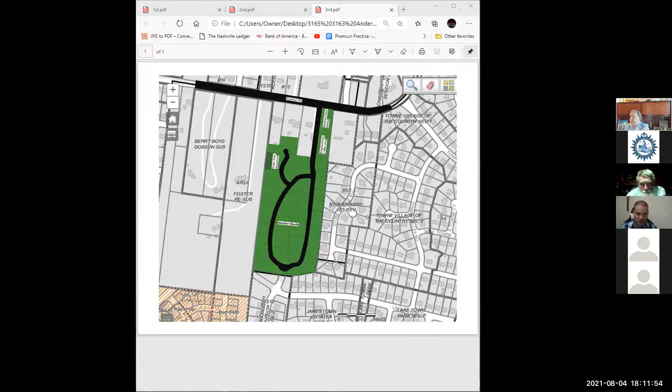So if we were to cancel the mixed use and just do it all houses and not have any kind of commercial over there, this would be the layout. This would be the entrance right here. And the egress, we're gonna have a gate at the end over here at Hamilton Lane. We would have an egress here. It's just gonna be a metal gate for emergencies.

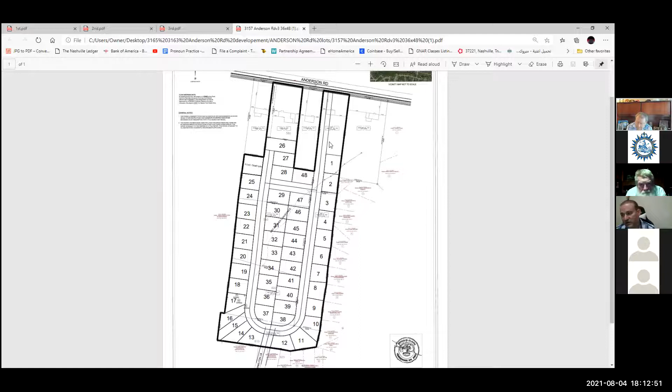This area here would have a retention, somewhere here or right where lots 27, 28, and 48 are lined. We're just gonna have to see what the zoning will approve. There's a total of 48 lots. And that's if the community doesn't want to do the mixed use as well. I'm still interested in doing the mixed use, but this is my plan B, which everybody was suggesting in the last couple of meetings, just residential.

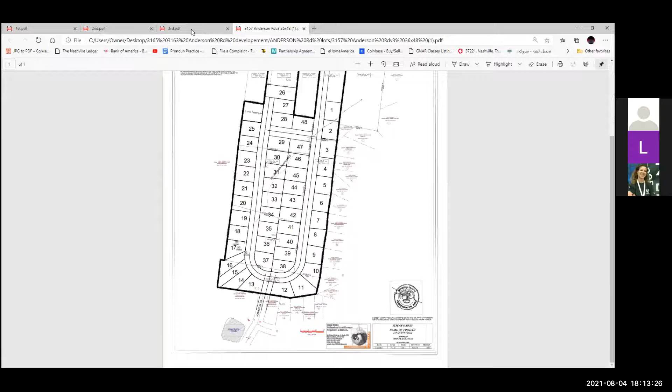Are you able to see this current screen that has the 48 lots? Yes, sir. Okay, perfect. All right, I'm ready for questions though.

So one thing I see right away, and this is something we've been having conversations about, is the horseshoe look of the road coming in, since it's only that one way in. Have you looked at perhaps circles or something so that cars won't just speed through there? This is gonna be a two-way street, and also if you see this link between lot 28 and 29, see that street there? This can be a shortcut, but the street is gonna be two-way.

Okay, so that leads itself into people coming in on that straightaway and going fast. So one of the things we sometimes talk about when dealing with calming is either some speed bumps, or a little traffic circle, or just something so where there's a long stretch of road, cars won't just come in. Yes, and I spoke to the engineer, and he said it's possible we're gonna have a couple of speed bumps over there. Okay, great.

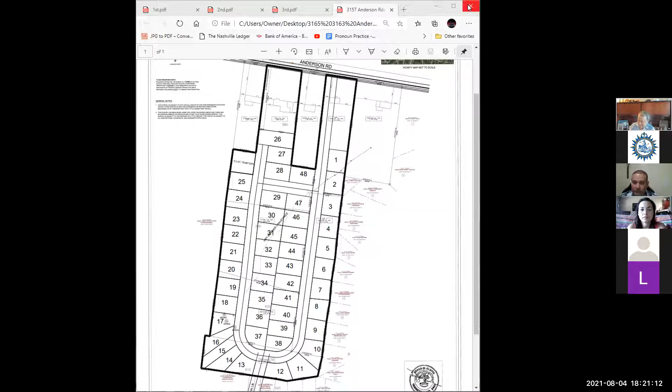Go for it, buddy. Part of it we hadn't talked about, because he was doing something else, but we always talk about the setbacks of the garages, the materials on the house, all those type of things. So when you all look at it, don't think that just goes by. It's just that because he was looking at something else, we hadn't spent a whole lot of time discussing that.

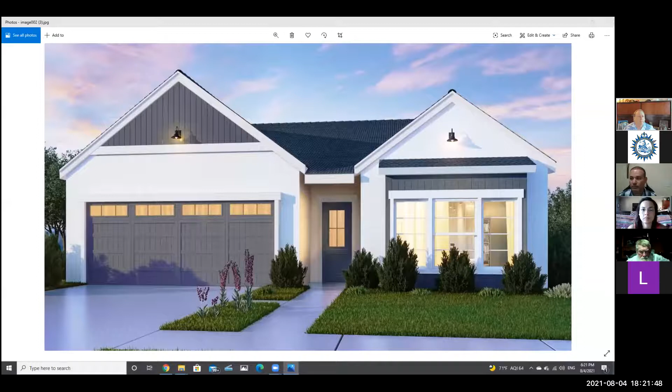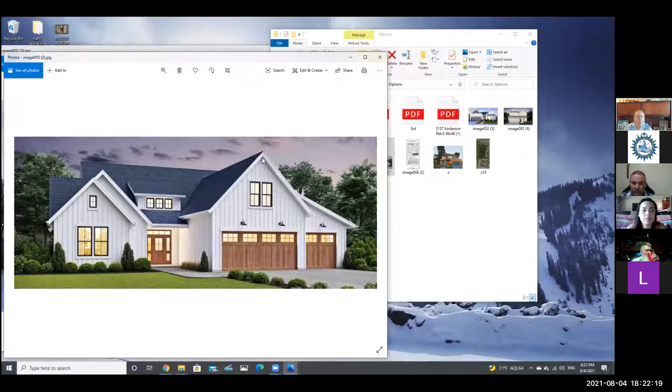Are you able to see that screen? Yes, the screen that has the one-story house? Okay, so basically this is how my one-story house will look like. I got another one right here. Are you able to see the second one? Yes.

These are Hardie board. But some of the community members wanted to have the front as bricks, and I'm willing to accommodate that and just do the front in brick. The siding will not be vinyl, it will be Hardie board. Hardie board can live for 50 years, it's made of concrete, and it's a better quality than plastic vinyl siding. That's what I've done with the most recent house I've been building in 37221 in Nashville.

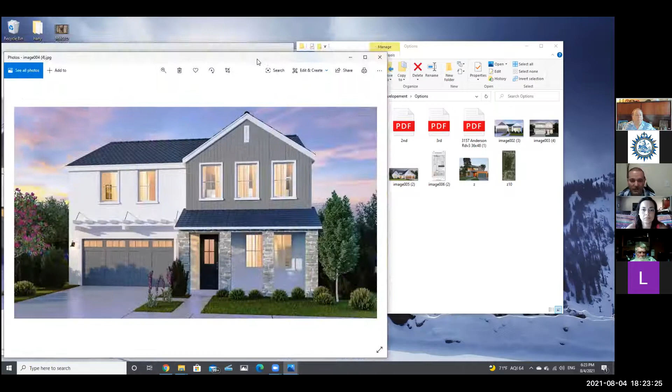This is the 2-story. I don't see a green on my screen. I'm not sure if I'm sharing it or not, but are you able to see the 2-story house? Yes. Okay.

And this is another elevation that I have. But we will be changing the front to brick. However, I really like it the way it is right now, but I'm just willing to satisfy everybody's suggestions. It's almost the same cost.

Sam, hi, I have a question. Can you hear me? Yes, hi. My husband and I were wanting to know, is it just gonna be one-sided brick, or what are the accommodations there? It will be front brick and the sides will be Hardie board. Just the front, okay. The Hardie board is different than vinyl. Vinyl is very fragile, it's a very cheap material. The Hardie board can live up to 50 years or even more.

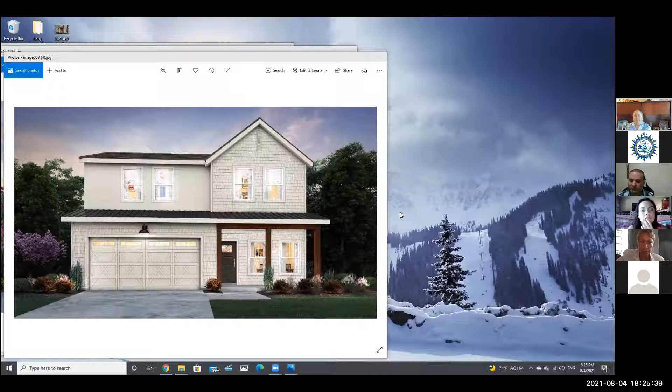Since I don't hear any questions right now, what I will ask you all is to have a little bit of conversation. You know, when Mr. Saeed came... I don't know, can I be heard? Yes, okay.

When Mr. Saeed first brought this to us with the mixed use, there was a lot of pushback with the mixed use. So now he's changing it up a little bit. So maybe some of you, if you don't have specific questions, just may have some comments about how you feel about changing it up a little bit and doing, I think you said, Mr. Saeed, 48 houses? Yes, there'll be 48 lots.

And if you saw the overall view, if there are some other things that you want to suggest that he do to help in that area—turning lanes, or any specific things like I talked about, the roundabout or the speed bumps—any specific things like that you may want to share now that you're thinking about in the back of your mind that may help that area, go ahead and put it out in the conversation with us now.

Councilmember Lee, this is Larry. Yes, please sir, a couple of questions. Sammy? Yes sir. What experience do you and your proposed builder have with this size of a development?

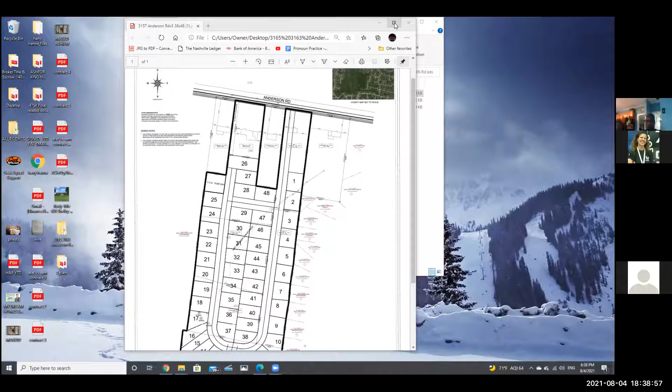Since the project is less than 50 lots, they're not requiring a traffic study, because the project is very small. But this is not the final plan. They're going to have to approve it and put comments there, and we're going to have quite a few changes there.

So I have another question, because all of this is interesting to me and is still quite new to me. I know it is not your intention, but suppose you sell this to somebody else, or something happens and somebody else has to buy it. I just want to make sure that whatever the zoning is, we've got everything in there—if it has to be an SP or whatever—so that the quality we're talking to you about will still be there, and whoever buys it can't just change it and put up any kind of thing.

I'm not selling this, I'm going to develop it myself, but I'm very open—whatever makes you feel comfortable, I can do. We can sign a document saying this has to be front brick, and we're going to have to have Hardie board instead of vinyl. I don't mind at all. Those type of things have to be in the SP, correct? Because I know it's not your intention, but life is so short, you never know what happens. I really don't mind at all.

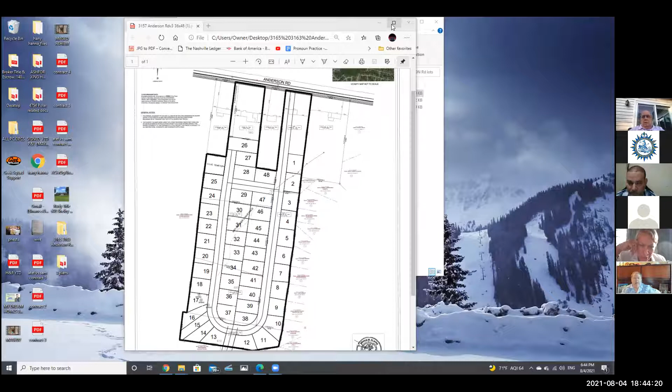What is it like in between? Do you know where that is, Miss Gladys? Can you pull up a map? No, I don't, Council Lady Lee. Do you know, Melissa? Yes, I think that's very close to us. I'm bad with maps, I need landmarks. Tammy, can you give me the screen for a second so he can pull up a map? Sure. I've already got a couple of maps pulled up.

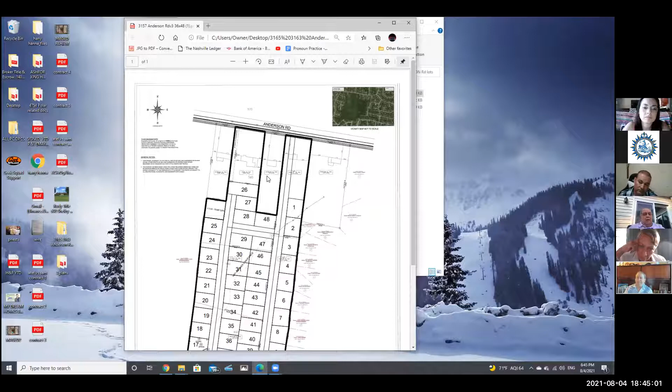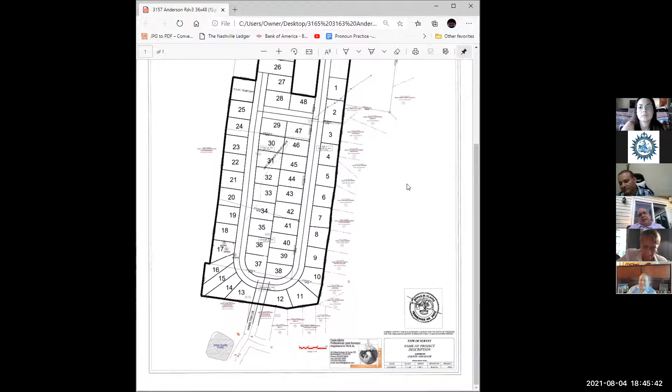While he's doing that, I also want to point out that in Council District 29, nearly directly across the street at 3156 Anderson Road, Roy Dale and Associates have requested a rezoning for 22 multifamily units. The combination of the 48 and the 22 gets us to 70 combined. That still doesn't hit what Metro requires for a traffic study, but it does have a huge impact—it's still 600 trips per day coming out of those two developments, and directly across from one another, that makes the turning a little bit more sketchy.

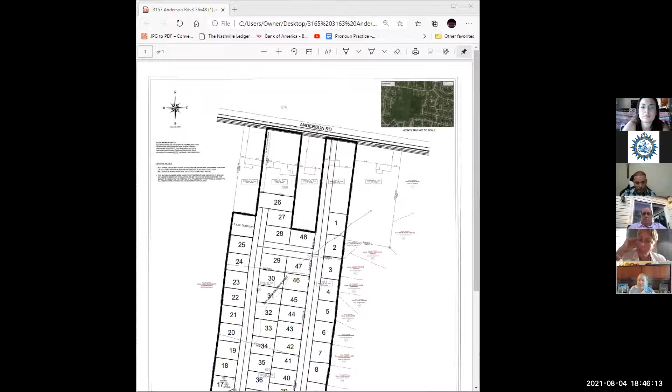Yeah, I'm glad you brought that up. Council Lady Lee, I had reached out to Council Lady Porterfield about the development across the street—it's directly across the street. She was going to include us in the conversation, but I haven't heard anything of late. Maybe you could chat with her and see how we could make sure we're all doing the right thing.

Are you able to see my screen now? I thought we weren't putting up any more apartments. I think they're duplexes. Attached townhouses, you mean? Very well could be. I haven't looked into detail into Roy's layout.

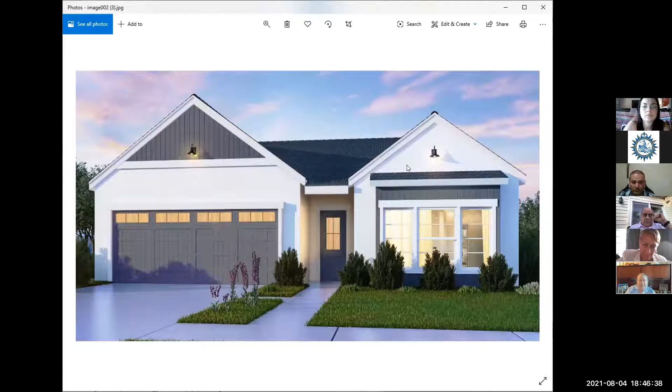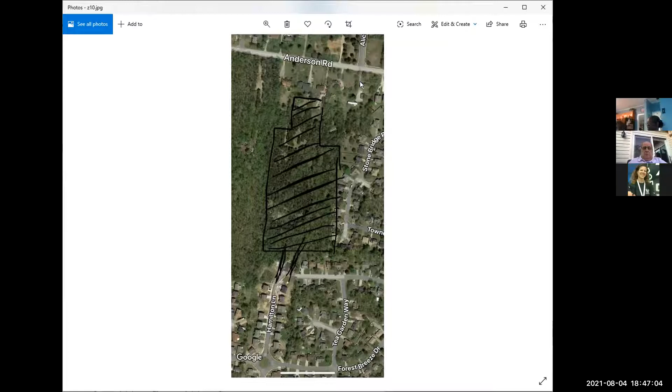Ms. Gladys says it's 2.5 miles from Lakeside Cove, so 2.5 miles from us. Is it like between, before we get to Compton in that direction? It's like if you were going through Long Hunter Chase across, and then you go around the loop all around. It's kind of tricky to get there, but it's really close.

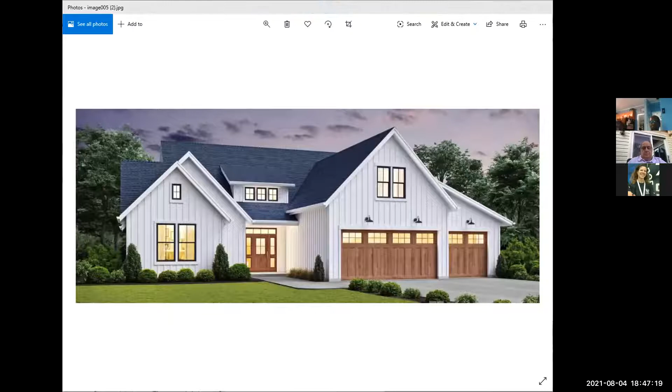Sammy, if you can give me the screen. Sure, go ahead. Okay, so is it straight across the four-way stop there at Anderson and Smith Springs in that direction? Yes, but then you go in through little streets and to the left. So it's parallel to Hobson Pike.

Sounds like to me, since right across the street another district is putting up quite a few townhomes, that one of the things we need to be pushing is that—because that's much larger than what Mr. Said is looking at—they may want to be looking at doing a traffic signal or something to help with that traffic, instead of just us looking at it, since their density is going to be much larger and impact Anderson Road a lot.

Well, actually their density—it's a smaller lot, and 22 homes is what the application calls for. Just to clarify, 22 townhomes? 22, I think it said multifamily homes.